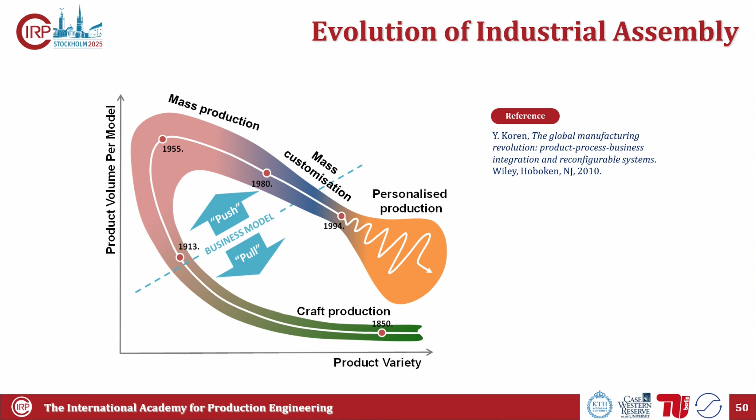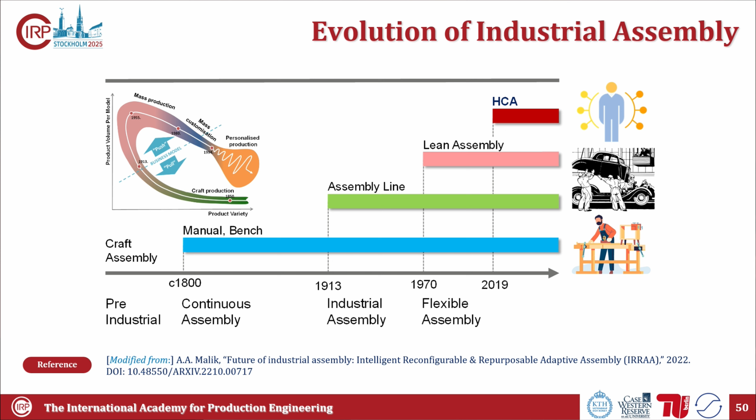Evolution of industrial assembly was influenced by the evolution of manufacturing paradigms. Over time, different manufacturing systems also influenced assembly systems. From the beginning, it was craft assembly, gradually moving to mechanized assembly, then automated. More recently, we talk about human-centric assembly.

But why do we need human centricity? We think, looking into the future, we need to preserve our own basic values. Our personality, we have ideals, we have beliefs, we have curiosities. Those are very fine qualities that really drive us to think more. Based on that, humans have creativity, ingenuity, and innovation. Collectively, it forms our wisdom.

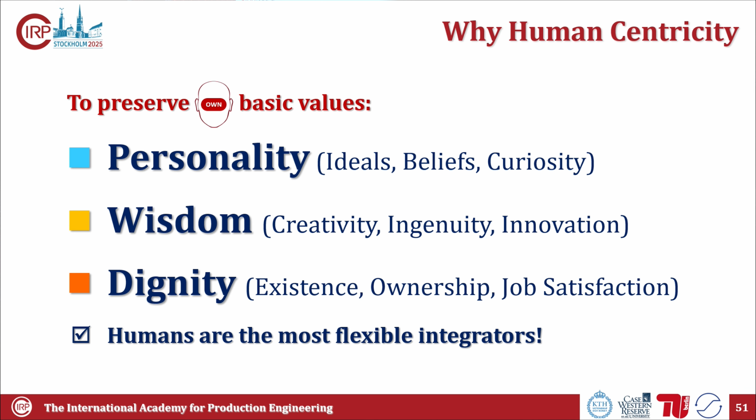Most importantly, dignity. Our human existence, our ownership, job satisfaction - without humans, those things cannot be done. Humans, as the most flexible integrators, cannot be replaced by AI or by machines.

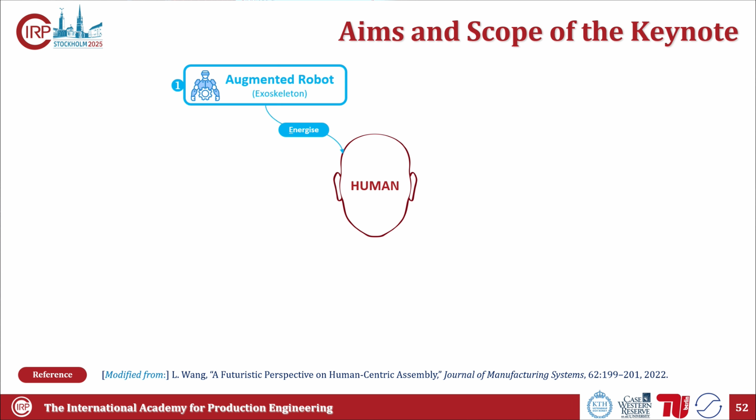Thinking about manufacturing assembly operators in the future - this is the operator in the future, a human. We don't have strong muscle strength. We cannot compete with a robot. What can we do? We can use augmented robots, for example exoskeletons, to help us energize ourselves, so over time our muscles will not experience too much fatigue.

Normally, we make decisions based on our perception. However, what is going on in the next room, we don't know. But if we have a cognitive system, like a multi-agent system, to help us collect all the information around us, we have a holistic view. We can make global optimal decisions at all times.

We use our five senses to observe the world - seeing, hearing, and so on. But sometimes we want to see what is invisible. If we use augmented reality, we can see something invisible. This is very helpful for human operators.

We can also use digital twin, sending it into the near future to explore what is going to happen. Then the digital twin will tell us with more precise prediction in 5 seconds, 5 minutes.

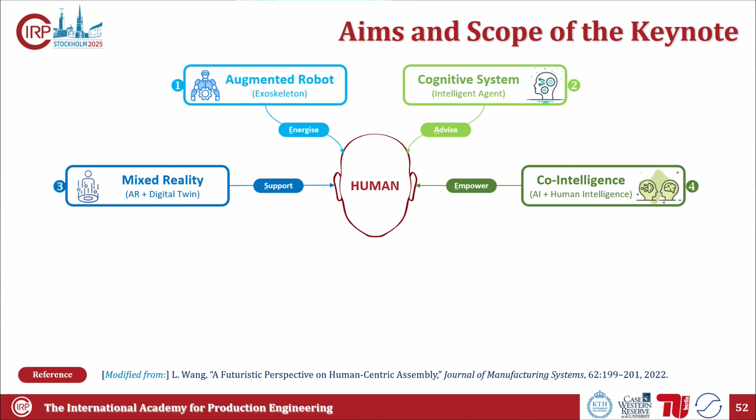AI is very powerful. Perhaps we can combine human intelligence with artificial intelligence. In this way, 1 + 1 is greater than 2. Humans can tell robots what to do to train them. Robots can help us do easy jobs.

Then we can apply our knowledge and experience to do human-centric assembly, supported by augmented robots and based on real-time situation. So the aim for human-centric assembly is to ease the human task.

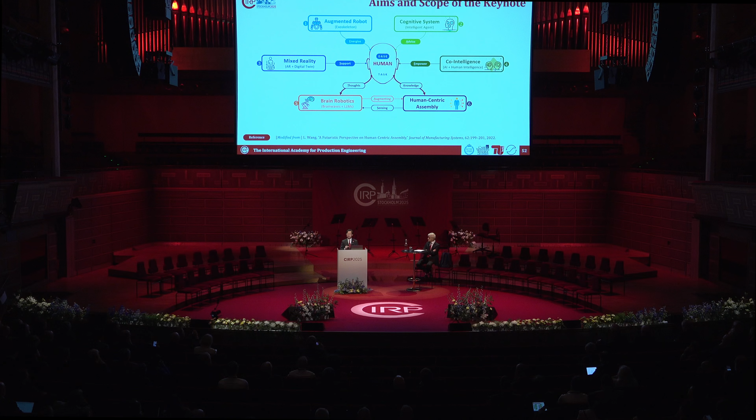You watch the movie Mission Impossible - Ethan Hunt, or Tom Cruise, using smart devices, can accomplish impossible missions. In the future, humans can do the same thing. The mission impossible for manufacturing today will be possible tomorrow.

We also need to work together as a team. If the team works together, we can realize both sustainability and resilience at the same time.

For this keynote, we have 5 different objectives. Because of time, I will not go into reading them, but those are written in the keynote paper. We need to enhance human capability, increase safety, ergonomics, worker satisfaction, and job enrichment.

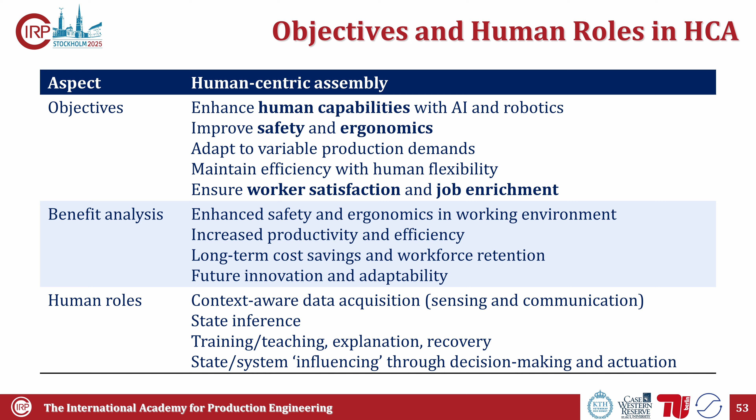Humans' role in the future will be context-aware data acquisition, state inference, training, teaching, explanation, and recovery. That's our job - state system influencing through decision-making and actuation.

The keynote is divided into 10 chapters. I will focus on the technical part, and also identify the future challenges and directions.

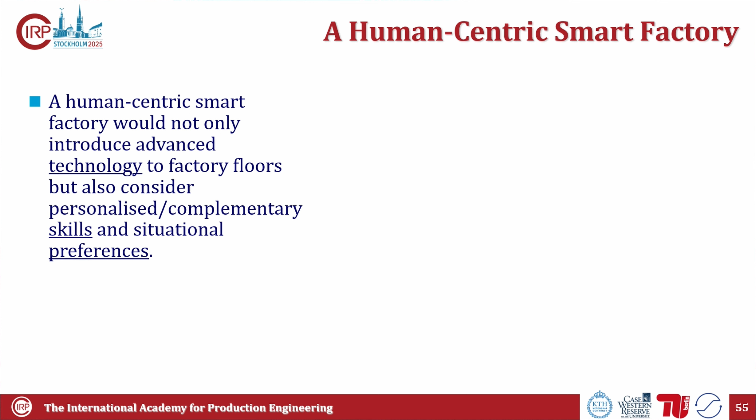First of all, what is a human-centric smart factory? We consider a human-centric smart factory would not only introduce advanced technology to factory floors, but also consider personalized complementary skills and situational preference.

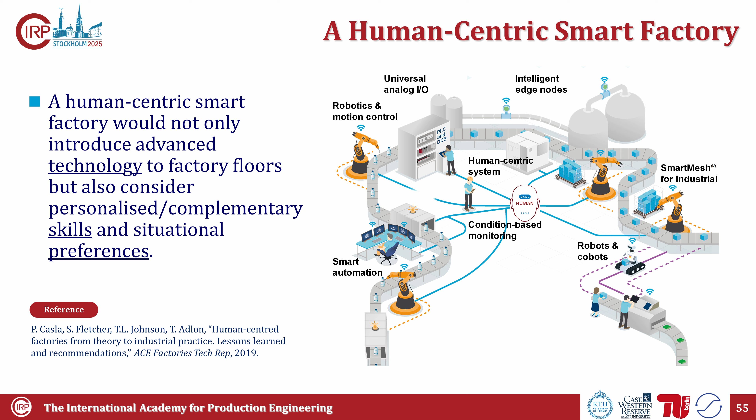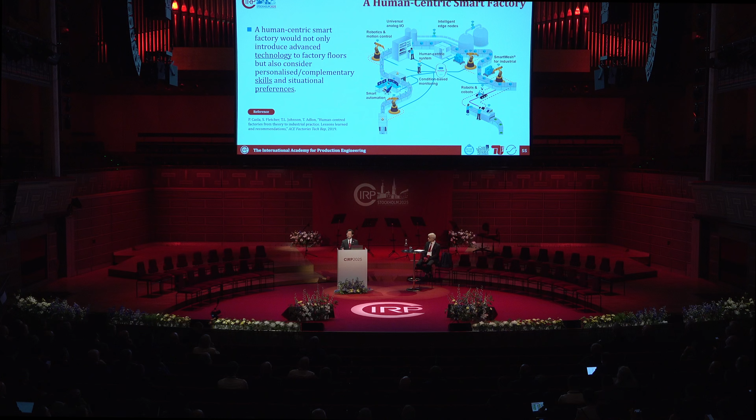This would be a smart factory with a human in the center. We already have different enabling technologies along the production line and assembly line, but eventually critical decisions need to be passed on to the human to make. The decision is critical - otherwise, it can be automated by computers or robots. The future operators may take different shapes.

It can be in these 8 different forms, supported by different enabling technologies. Let's go through some of them as an example.

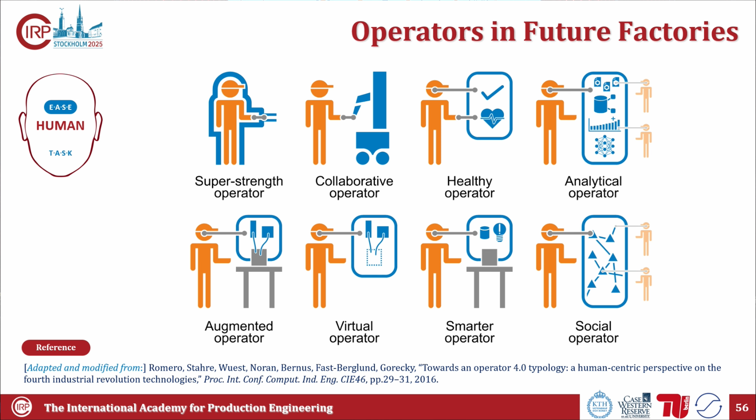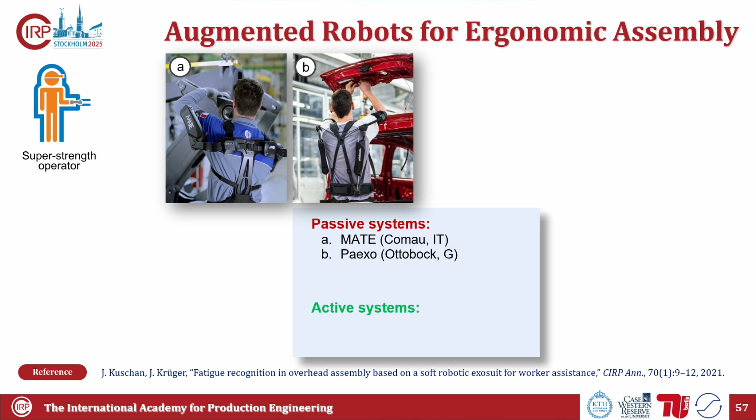Super strength operators, like exoskeleton. There are 2 types, basically passive and active. Here are 4 passive systems listed from different companies, different countries. There are also active systems. By active, it means motorized.

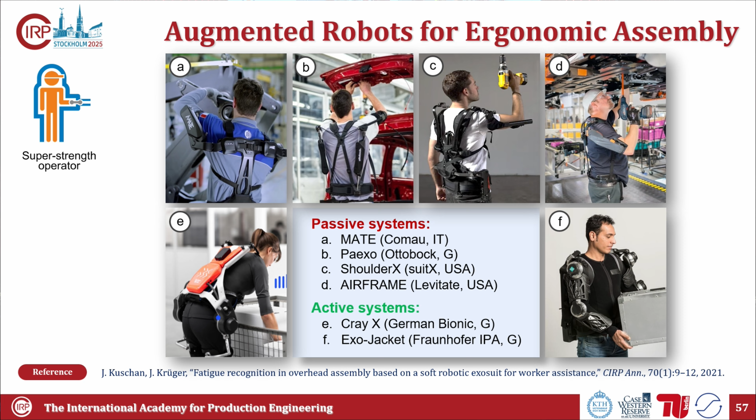Let's take a back exosuit as an example. When we bend down and raise up, we use our muscles in the back and the leg, following the joint in the hip. This device uses the same principle.

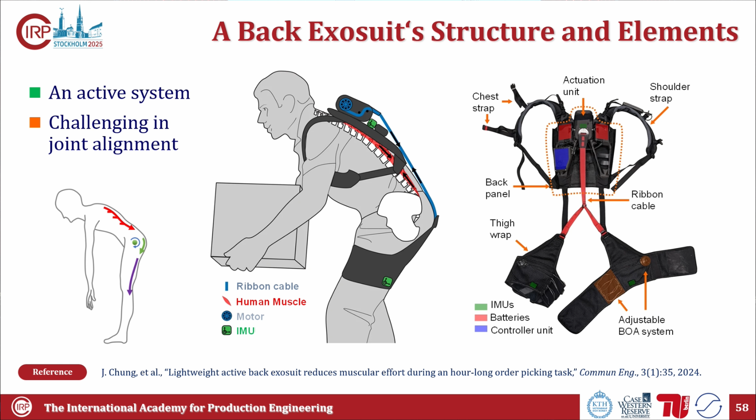However, there's one challenge: the alignment of joints. If the joints are not aligned well, we don't feel comfortable. Or if I'm bending down and the motor tries to pull me up, we cannot do the job. So there's some challenge there, requiring advanced sensor technologies.

AI is very powerful, and it needs to be supported by other tools like VR, AR, and MR. I'm sure you all know, you're quite familiar with this. I will skip this part.

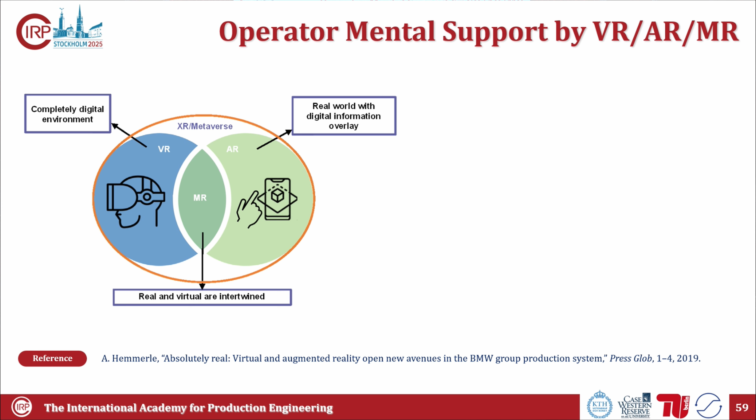But supported by AR, we can do the job with human support on the fly, on demand. This is one example: an augmented operator supported by AR.

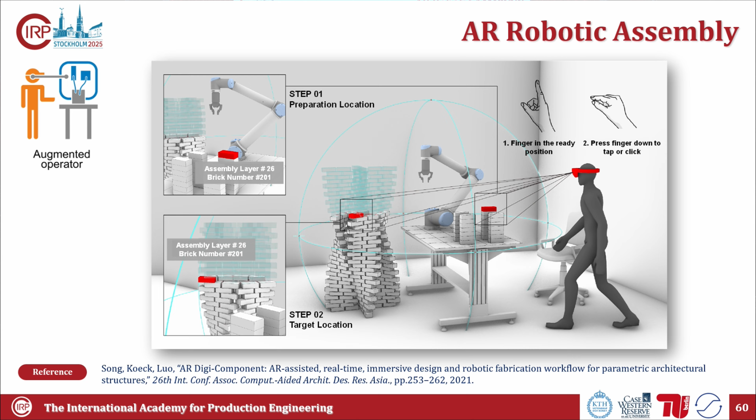Use this smart goggle, we can specify the start position and specify the trajectory using our finger gestures. Eventually, in this case, bricks can be laid up one by one. This is an atypical type of assembly, but the same technology can be applied to manufacturing assembly as well.

We can use a digital twin to help us, as I mentioned earlier, sending a digital twin into the future to explore what is going to happen.

Assembly task or robot execution takes some time, a few seconds or a few minutes. During that period of time, the digital twin can explore what would be the optimal parameter given the current situation, and simulate whether this trajectory is the best, also considering external situations like obstacles. If it's good, send it to the robot to do the operation, otherwise redo it in the digital world.

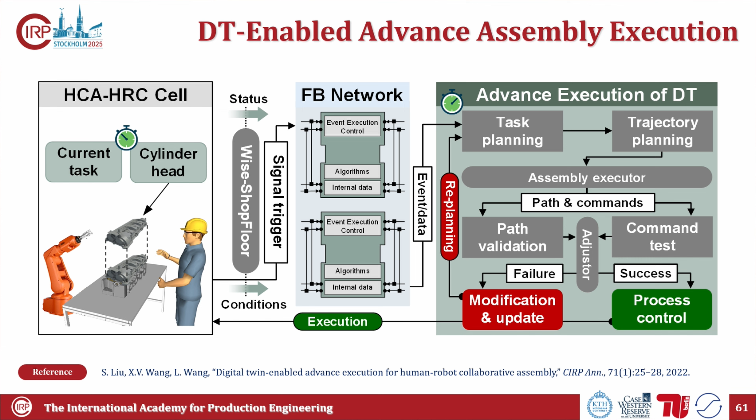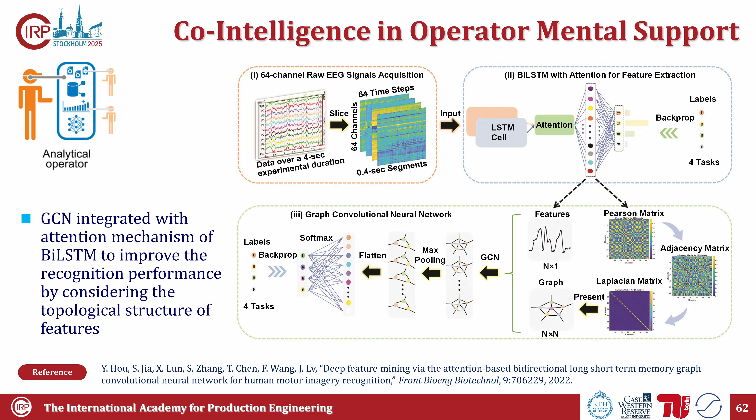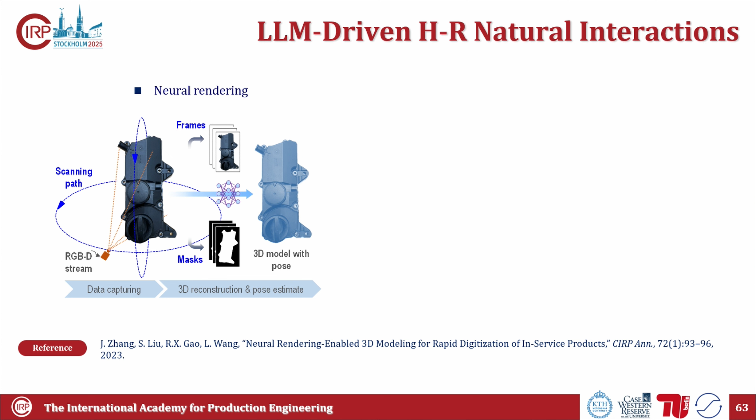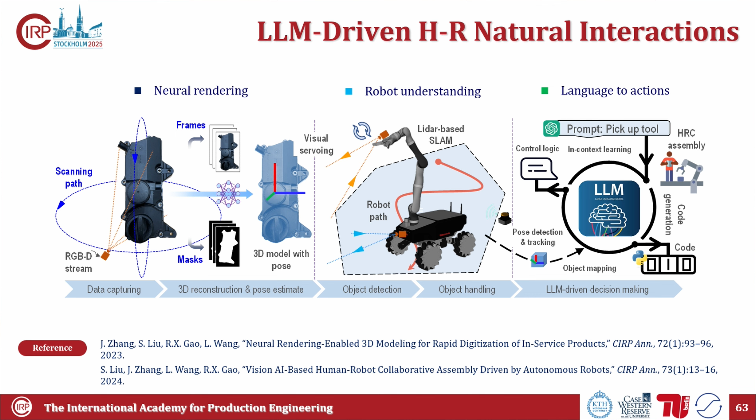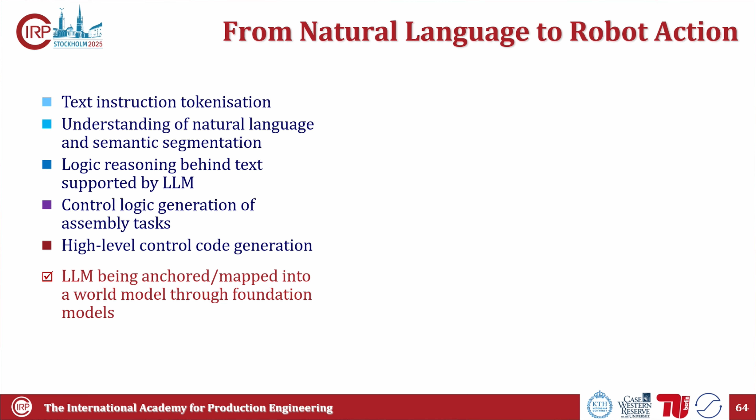Even today, we have many different large language models. All of this needs to be anchored and mapped into a world model through a foundation model. This is very important—do not lose the context.

So this is just an animation showing how the command from natural language is eventually passed to a robot.

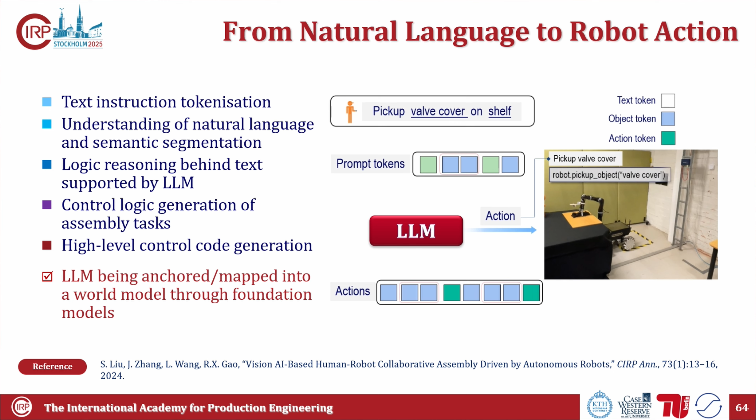The next topic is how to use our brainwave to control external devices, to control a robot. If this can be done, we can control the robot at close distance or in remote mode.

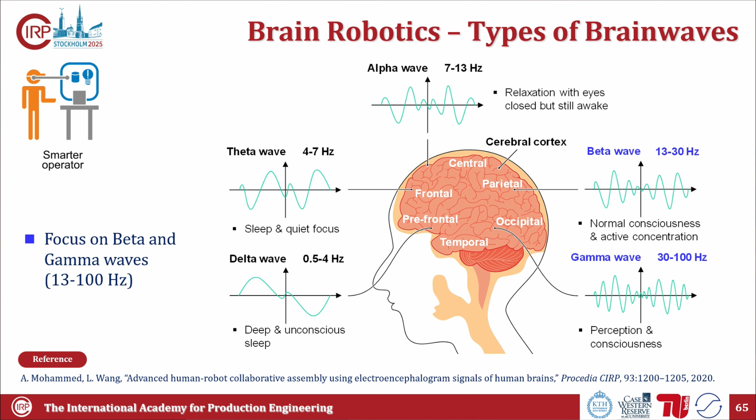We use our brains in different ways—everyone uses their brain differently. The brain can be divided into chiefly 4 different regions, and based on whether you use language, memory, or vision, different parts of the brain will be activated, and that signal will be retrieved. Based on this, we can do the analysis.

However, thinking involves several parts of the human brain. We cannot know for sure everyone uses the same brain at the same time today and tomorrow. There's a change in the morning, in the afternoon. Our brain will be influenced.

This is one challenge. Holding a single thought over several seconds is challenging. We tend to think something else. Focus is difficult, especially difficult in a factory setting.

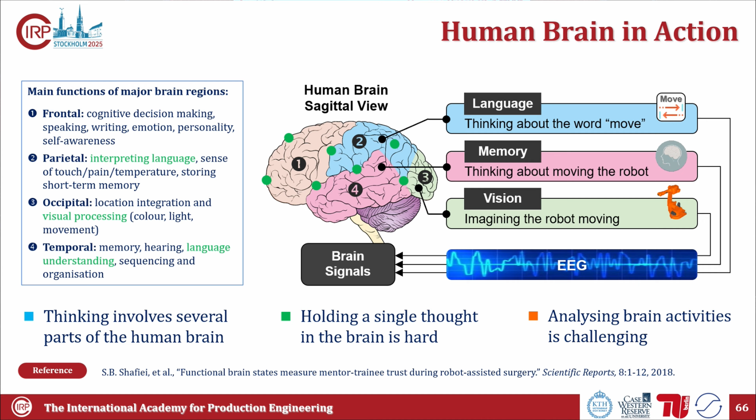There's noise surrounding. How to analyze the data is also another challenge. Normally what we do is use EEG, electroencephalography, to collect information, pass it onto the computer to do signal processing, and eventually we can control the robot.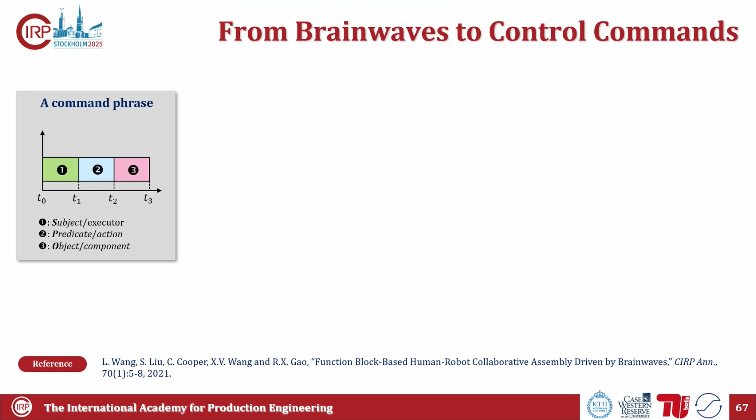There's different ways to control the robot or process the brainwave signals. The simple way is to consider 3 different patterns in one sentence: subject, predicate, and object. Very simple grammar. We pass this brainwave in the waveform to the computer. It contains 3 parts or 3 words. We call it the control words.

And then this waveform is converted to time frequency images through continuous wavelet transform. We can have more information dug out later. Because CNN is very good in processing images, we pass these TF images to the deep learning model.

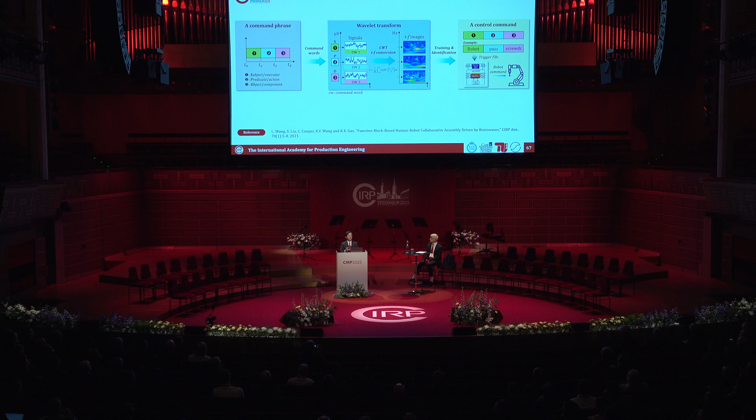Eventually, we can figure out what I'm silently thinking in my brain is actually 'robot pass screwdriver.' That command will be sent to the robot through a function block. The function block contains an internal algorithm. The internal algorithm is based on information received and also some other information dynamically collected from sensors to modify the decision algorithm to generate a different result adaptively.

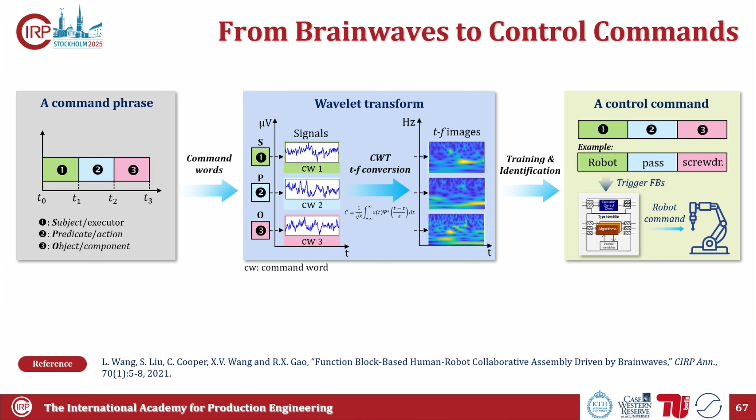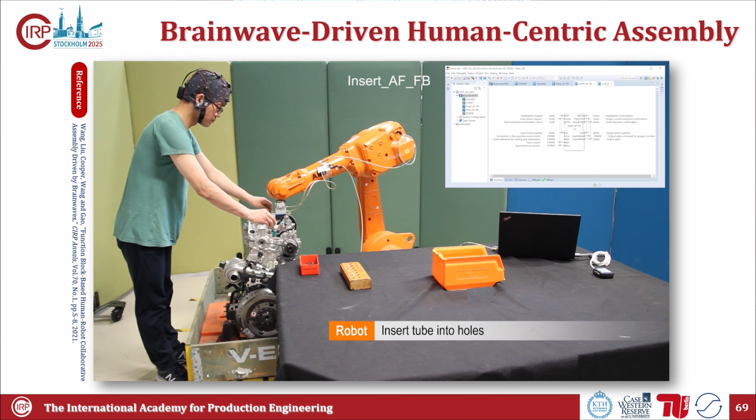This keynote also identified 10 challenges. These challenges of future research directions can be divided into 3 different groups. We use a color code to group them: the red part, green part, and the blue part, with different geometry shapes. Because of time, I will talk about challenge number 3, foundation models for natural human-robot interaction, and also explain number 8, new safety standards for human-centric systems.

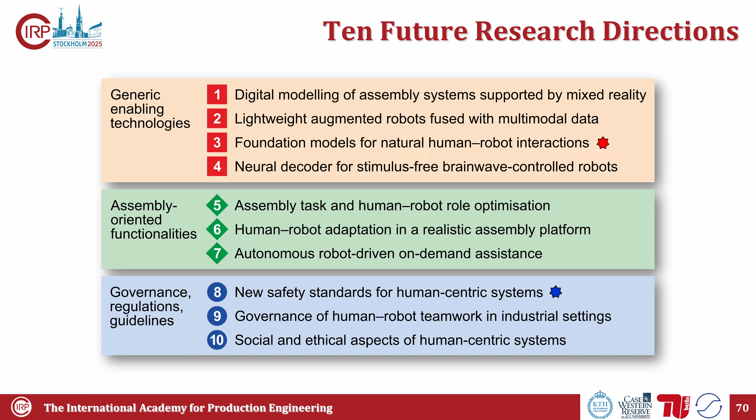You may wonder what's the relationship between the 10 different future research directions. This is their grouping, their relationship. We summarize it into a table. The top shows the level of organization. It could be relieve, delegate on the top row, or could be augmented, extended. The last one is inclusive and integrated.

In terms of technology capabilities, it's listed in the first column to the left. It can be used in design, building, validation, system configurations, and can be used for planning, optimization, integration, interaction, and learning at different levels. In terms of anticipated impact, it shows whether it's a dark, thick line circle or black, or a thin line boundary.

The first example, number 3, foundation models for natural human-robot interaction. If we apply this future research direction to row 3 for interacting with the environment, sensing, calibration, and actuation, their role is average, shown in the thick line.

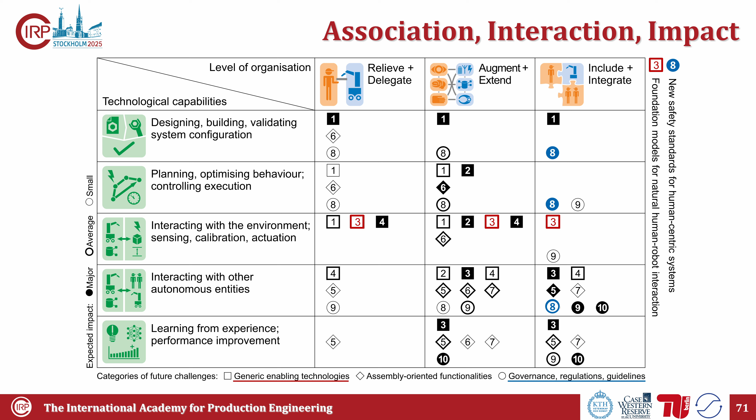We also wonder, how long does it take the roadmap into the future? This is a real challenge for the team. The starting point we know, but the ending point we can only guess. So this chart is normalized from 0 to 1, where 1 means everything is finished, achieved. And the technology shape is similar to the technology group in the earlier slides.

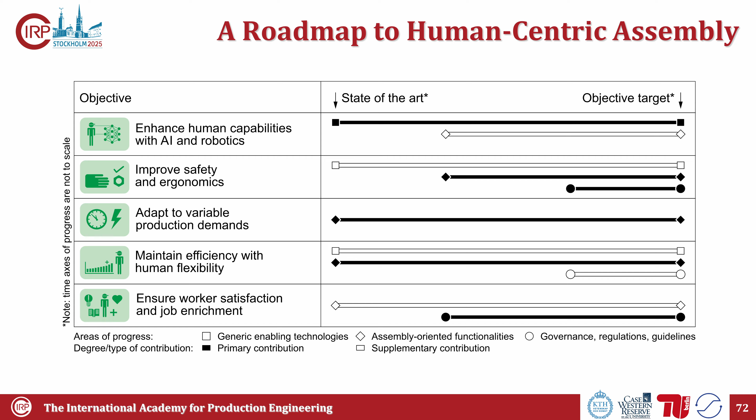Some of the technologies need to be further developed. Some are already in dark line, dark shape - that's quite mature - but some are not there today. We need to pay more attention, and hopefully sometime into the future, we can start to develop that and consider they are relevant to manufacturing assembly.

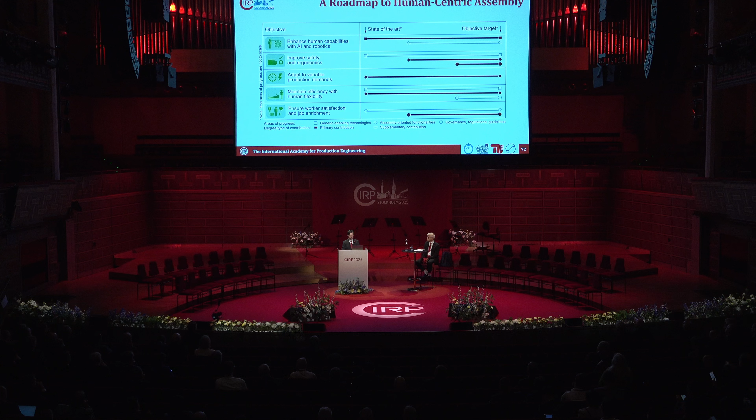Because of time, I will stop here. Thank you very much.